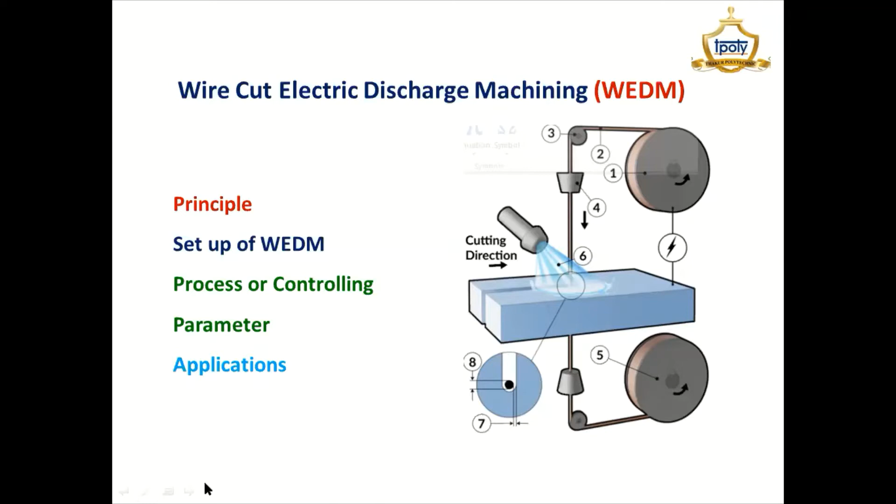In the wire cut electric discharge machining process, we are using the same principle which we are using in EDM. In EDM, you know that heat energy generated by a spark is used to remove the material from the workpiece. So on the same principle, it works. Here I have shown one diagram, the two wires I have taken, and the spark will generate between these two, and the spark which has been generated is used to remove the material from the workpiece.

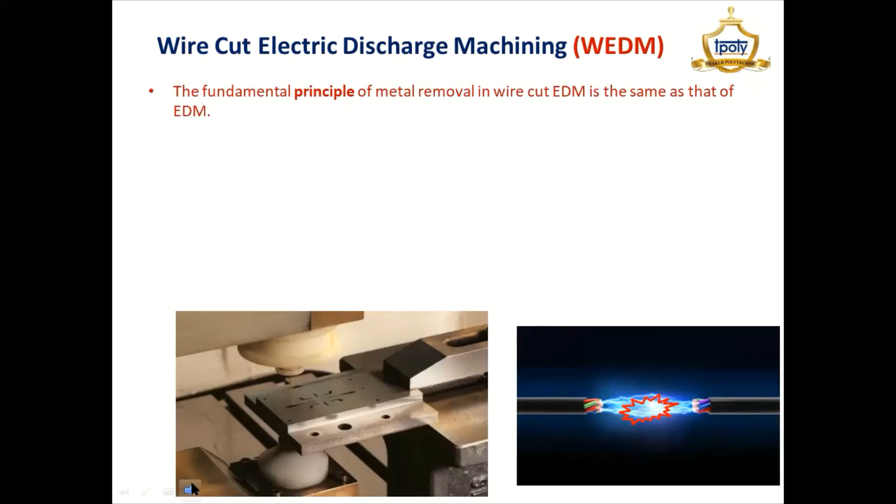Basically this process is comfortable when the workpiece to be cut has a through hole in it. Otherwise we can take just the outer edge of this workpiece, and the material can be removed by wire cut EDM. Here I have shown where the small holes are, through which the wire can be inserted.

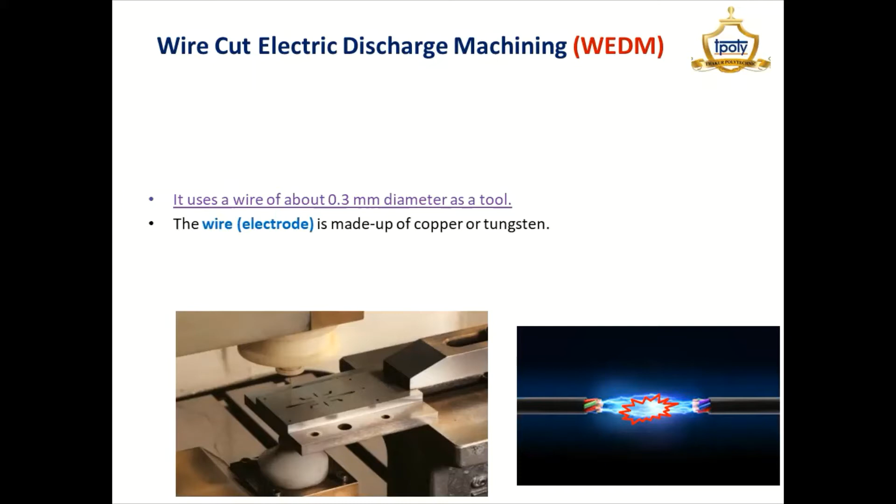The wire which we are using here acts as a tool, whose diameter is 0.3 mm, and basically the wire we are using is tungsten, or we can see copper in this case, and deionized water is used as a dielectric fluid. Deionized water simply means removal of ions.

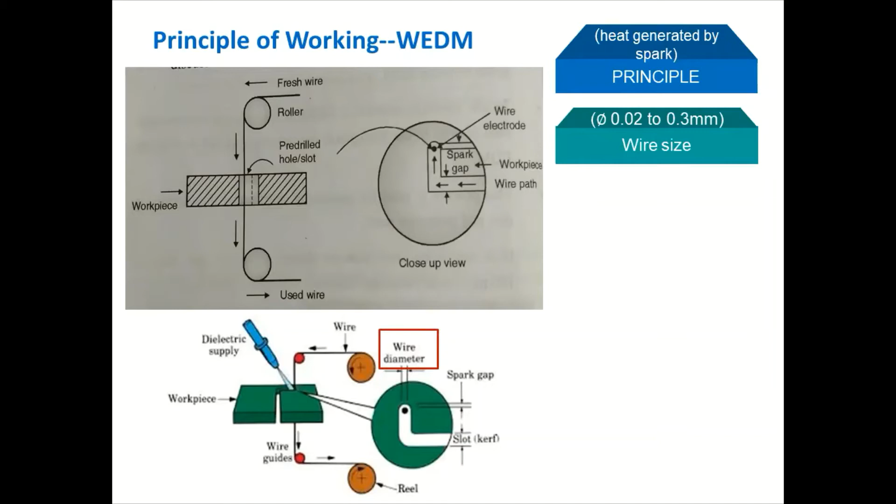Principle of wire cut EDM: it works on the principle that the heat energy generated by a spark is used to remove the material from the workpiece. It uses a wire of around 0.3 mm diameter, which just acts as a tool in this case. A constant gap we are trying to maintain between the tool and the workpiece, which is around 0.5 mm, and this is only possible by using the control system.

And the wire is continuously moved at a constant speed through the workpiece. A dielectric fluid we are using, and this dielectric fluid is constantly flushed in this area between the tool and the workpiece while doing the machining operation. So when we switch on the current, sparks are generated between the tool and the workpiece, and heat generated during this sparking process ultimately results in melting the workpiece.

In order to create the desired shape on the workpiece, the table motion will be given along the Z and X by using the control system. So this is all about the principle of wire cut EDM.

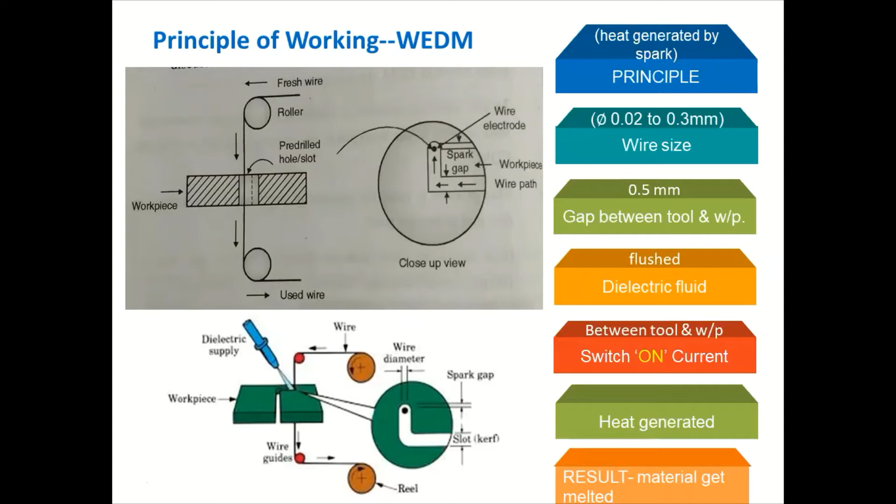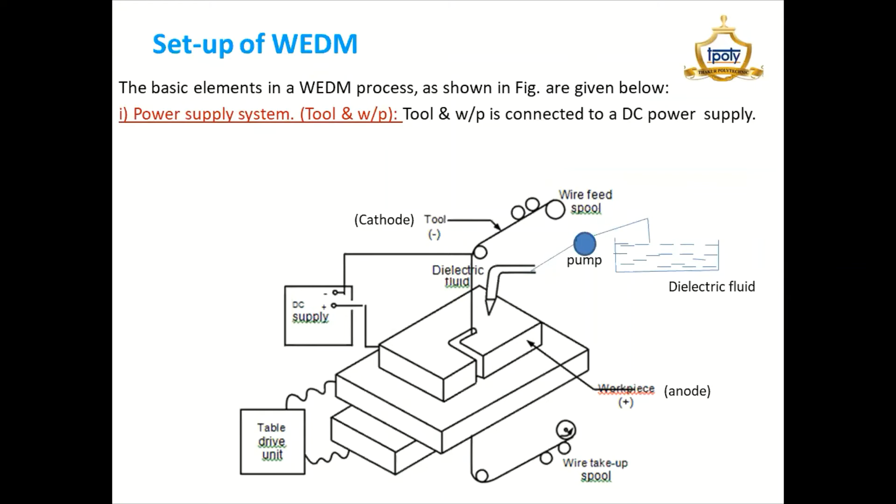Setup of the wire cut EDM process. As far as the setup is concerned, we will basically see four major parameters. Our first parameter is the power supply system. In this power supply system, the tool and workpiece are connected to the DC supply, and the voltage we are using is 50 volts.

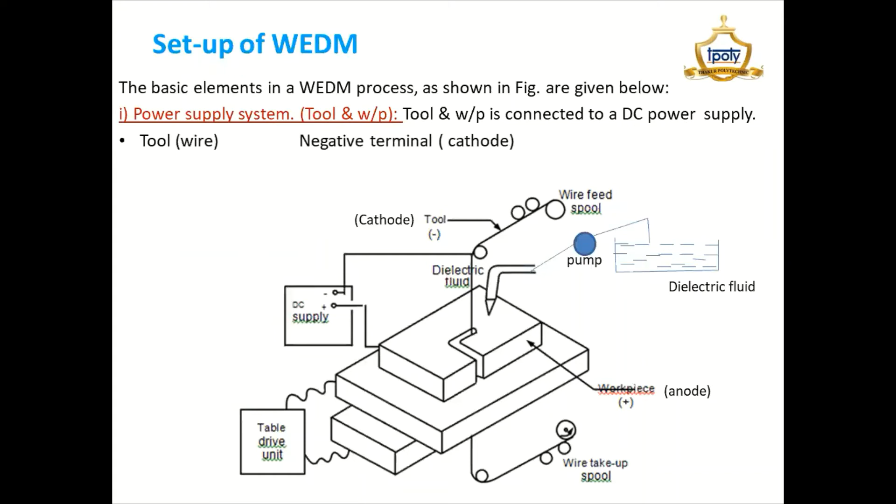So very less voltage is used because the wire is very thin, and as you can see, this is a DC power supply, and the wire will act as a tool which is connected to the negative terminal of the DC supply, and the workpiece acts as an anode and is connected to the positive terminal.

The second parameter is the dielectric system. In the dielectric system, deionized water is used as the dielectric fluid in WEDM, and a nozzle is employed. You can see here the nozzle, and the dielectric fluid gets injected between the tool and the workpiece by using the pump.

Then the third is the CNC control system. The CNC control system is used for the movement of this table. In this case, the table movement will take place in two directions, the X direction, and you can see this is the Z direction. Or both X and Z can be operated simultaneously, so that we'll get contouring cuts on the workpiece.

And fourth is the wire drive system. In this wire drive system, basically there are three functions. One, we can see the wire feed, to feed fresh wire for machining, which is called the wire feed mechanism. Second, you can see here the wire take-up mechanism, so when the wire is used, it gets wound there on the reel. And the third important function is to keep the wire under appropriate tension, so that it moves through the machining area as a straight wire.

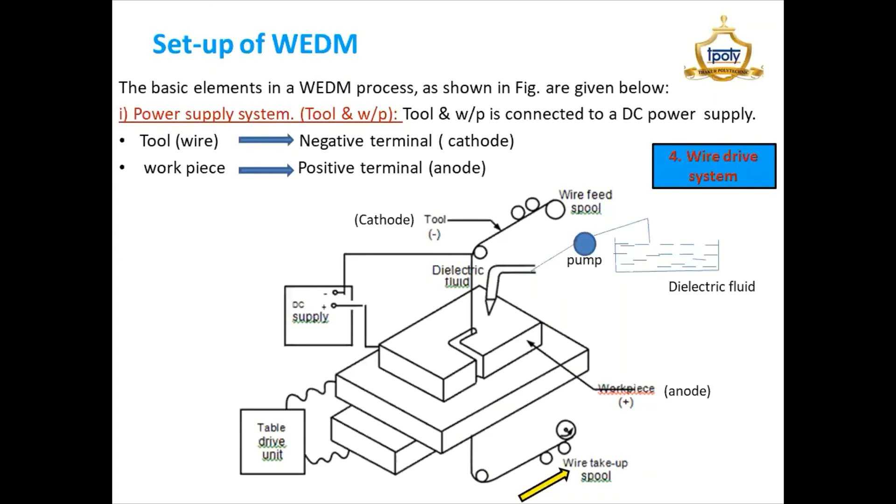So this wire is used only once. And during the operation, when the supply is switched on, the dielectric fluid gets ionized, and ultimately melting takes place on the workpiece. So this is what we have already discussed. Process, or we can say the controlling parameters of the wire cut EDM. In this wire cut EDM, again, there are 6 basic controlling parameters.

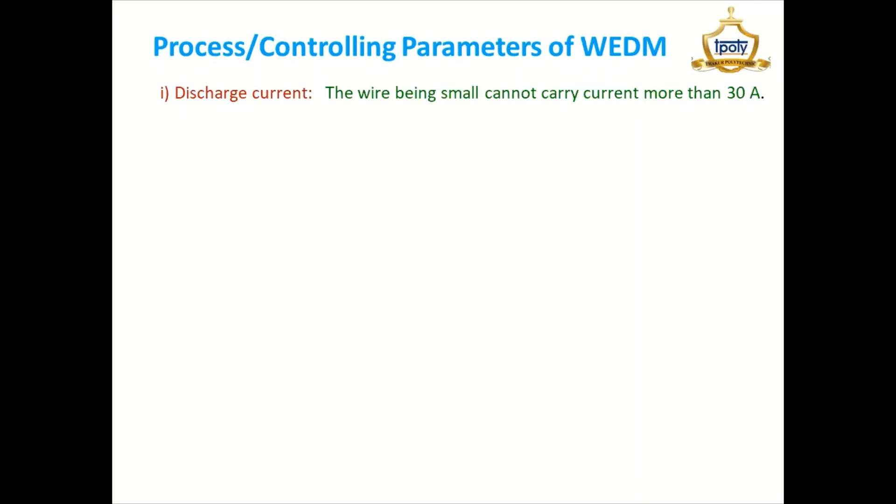First is the discharge current. Here, the current we are using is a very low current, around 30 ampere, because we are using a very thin wire. As the discharge current increases, naturally the material removal also increases. Second is the pulse duration. As we increase the pulse duration, the material removal also increases. But if you increase the pulse duration, we'll get a poor surface finish on the workpiece. Pulse frequency, mostly about 1 megahertz frequency we are using.

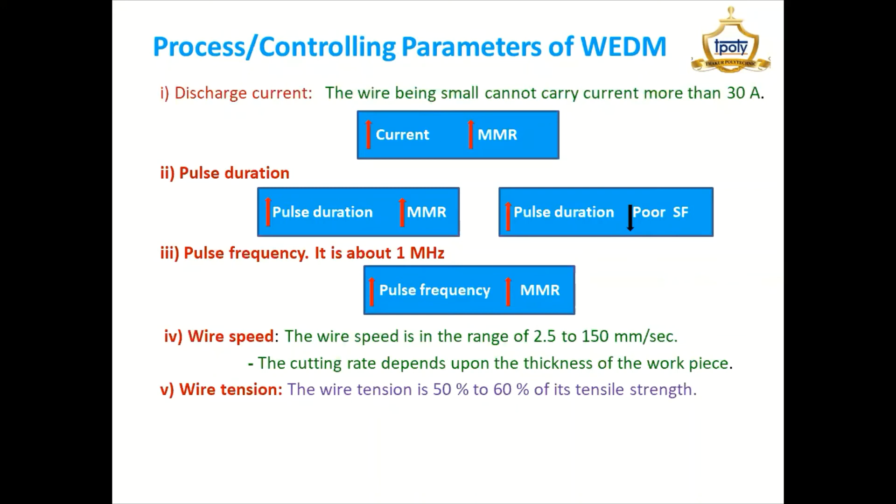Here also, if you increase the pulse frequency, the material removal rate also increases. As far as the wire speed is concerned, around 2.5 to 150 mm per second speed we can use. The cutting rate ultimately depends upon the thickness of the workpiece. An average machining rate of 10 to 15 mm square per minute is generally achieved with the help of this speed. Then the wire tension: appropriate wire tension should be maintained in order to keep the wire straight, and generally the wire tension is 50% to 60% of its tensile strength.

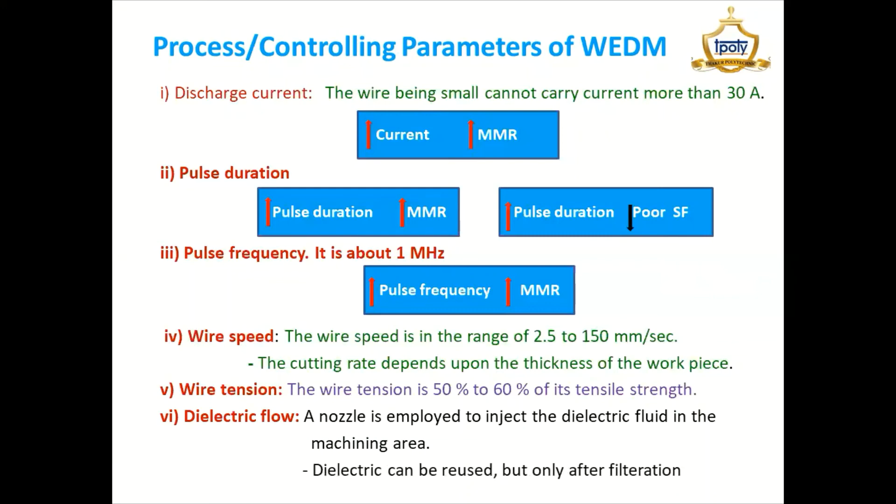As for the dielectric fluid, a nozzle is used to inject the fluid into the machining area, and the supply of dielectric fluid is continuous. The dielectric fluid can generally be reused, but only after filtration.

Even if you want superior quality at the edges, it is only possible in wire cut EDM. And cylindrical pins of small size, so if you want very small holes, especially in the needles used in syringes by doctors, it is possible in this case. So there are many applications of this wire cut EDM.